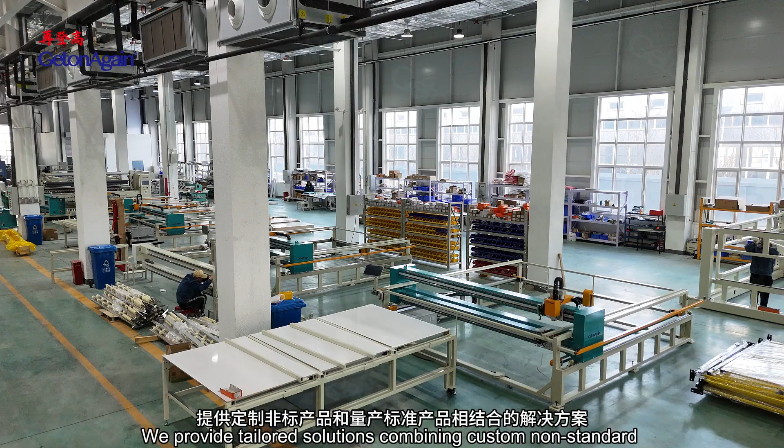We provide tailored solutions combining custom non-standard products with mass-produced standard products, including mechatronic machines, automated production lines, and intelligent factory solutions.

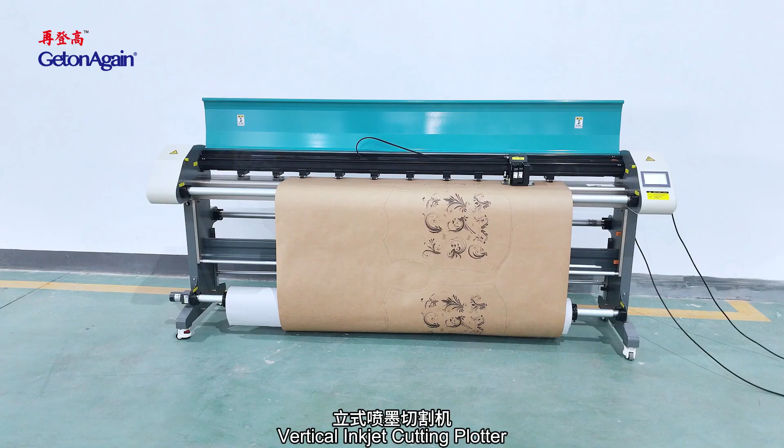Pattern room equipment includes the magic inkjet plotter: 2 cartridge with maximum printing speed at 110 square meters per hour, 4 cartridge with maximum printing speed at 200 square meters per hour. Vertical inkjet cutting plotter, 1 machine multiple functions, pattern drawing with cutting, or standalone drawing. High-quality rotary cutting knife can cut minimum 80 grams per square meter paper for sample design, cost saving.

Flatbed inkjet cutting plotter, full speed map printing and cutting function, suitable for personalization, configured with long knife or short knife, and optional fixed knife sleeve or elastic knife sleeve, suitable for cutting various materials.

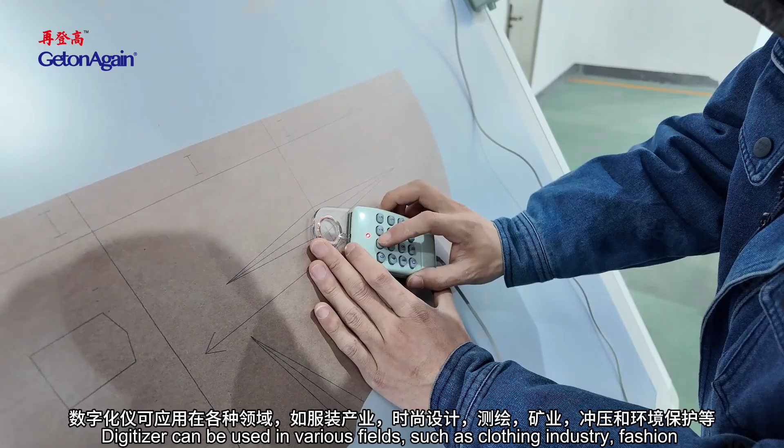Digitizer: easily reading paper patterns, convenient positioning, simple operation, accurately reading patterns, enables speeding up the design. It is a powerful tool for traditional manual drawing digitization. Digitizer can be used in various fields, such as clothing industry, fashion design, surveying and mapping, mining, stamping and environmental protection, etc.

Flatbed scanning digitizer: 1 button to start after placing scanning pieces. Can vacuum absorption auto scanning, auto transmission. According to different models, support ultra long width scanning. Scanning speed up to 7,200 mm per minute. Scanning resolution 150 to 300 dpi. High definition panoramic 1:1 image to ensure effective identification of various contours, notches, inner holes.

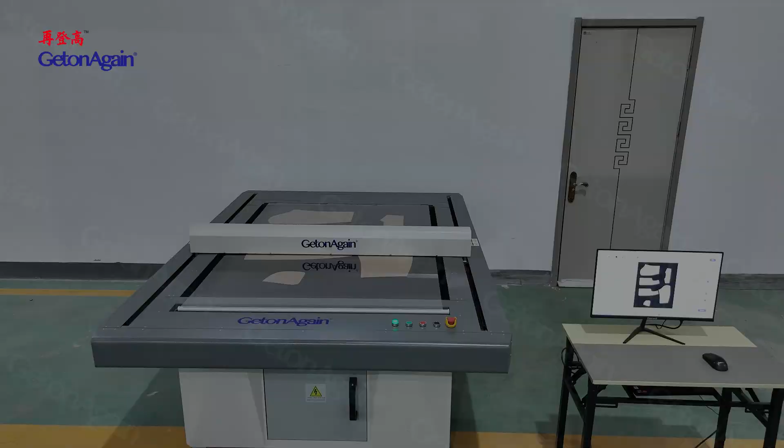Cutting equipment includes automatic spreading machine. Easily set the spreading method, length, speed, quantity and sections, with intuitive as well as simple operation. Dual use for both knit and woven fabrics, suitable for t-shirts, children's clothing, loungewear, and toy textiles.

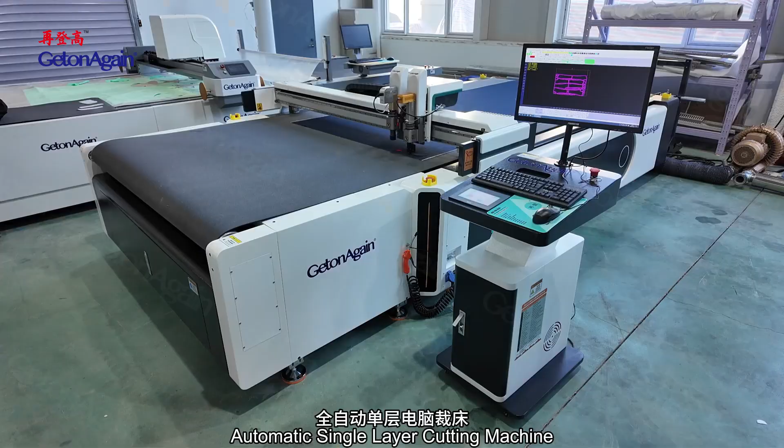Automatic single layer cutting machine. No need to create specialized cutting molds. Cutting can be performed precisely by directly importing CAD design drawings into the equipment. Optimizes cutting paths, integrates repeated cutting lines, allows for pre-simulation of the cutting process, and supports continuous cutting for extra long materials.

Stripe and plaid matching cutting machine, equipped with a few HD industrial cameras, according to the capture size to perform intelligent combination. Ensures high accuracy fabric image capturing.

Stripe and plaid matching auto cutter, equipped with double knives and pen draw punching working mode, special for various stripes and plaids fabric cutting in single ply.

High-end clothing customization: the effect of the alignment matched stripe and plaid process has become the important measurement on the quality of this type of clothing. Stripe and plaid auto cutter is the equipment specially developed for this process to meet matching stripe and plaid clothing, suitable for single ply cutting. Process of striped and plaided fabrics.

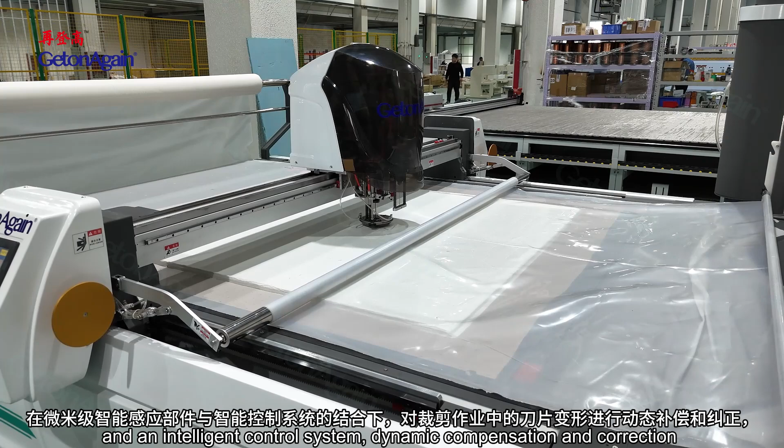Automatic multi-layer cutting machine: through the combination of micron-level intelligent sensing components and an intelligent control system, dynamic compensation and correction of cutter deformation during cutting operations are achieved, significantly reducing errors between the top and bottom layers of fabric during cutting, enabling truly high-precision intelligent cutting.

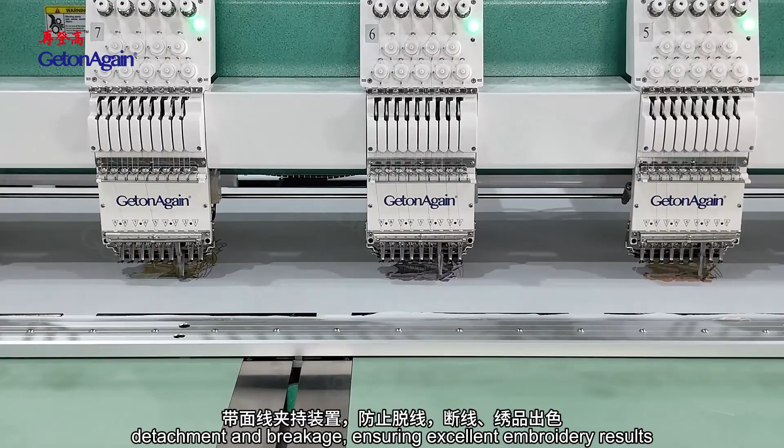Computerized embroidery machine: high-speed embroidery head with extremely low failure rates, long service life, low noise, and stable, reliable quality. Equipped with an upper thread clamping device to prevent thread detachment and breakage, ensuring excellent embroidery results. Suitable for textile and garment manufacturing, footwear, hats, bags, home decoration, automotive interiors, and industrial products area.

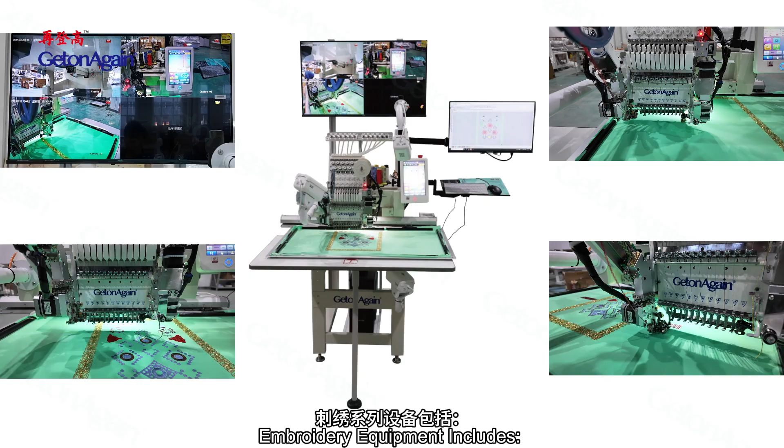Embroidery equipment includes the Cloud Smart Teaching Embroidery Machine, suitable for integrated theoretical and practical teaching of computer embroidery in fields such as fashion and apparel design, clothing design and engineering.

Computer Precision Embroidery Machine features a high-speed sewing head with extremely low failure rates, long service life, low noise, and stable, reliable quality, suitable for embroidering small letters, premium garments, high-end home textiles, footwear, hats, automotive products with embroidery, etc.

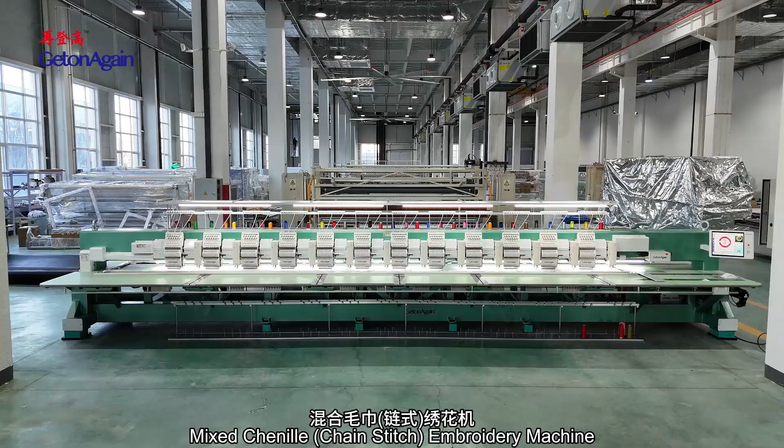Mixed chenille chain stitch embroidery machine. Mixed embroidery feature, according to color sequence settings, switchable between chenille embroidery and flat embroidery, simplified operation. Chenille needle height can be adjusted for 10 levels according to chenille pile height or chain stitch thread thickness. Multifunctional embroidery on garment, shoes, caps, home textile, toys, bags and luggage, art craft, etc.

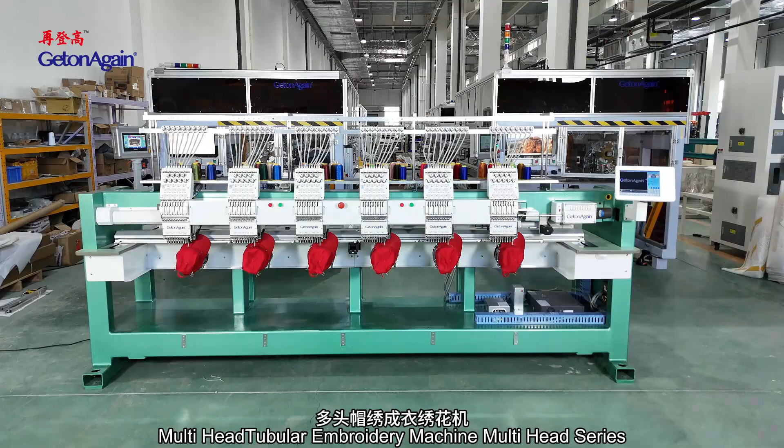Multi-head tubular embroidery machine series, suitable for embroidering on flat, caps, garments, shoes, belts, bags, etc. Auto thread trimmers, auto color change, auto thread break detection, 270 degree wide angle cap system, red light locating, LED lighting, precise head and drive system to ensure exquisite embroidery work. Drop tables, easy to lift up and down.

Multiple heads greatly improve work efficiency, suitable for embroidery shops and factories of a certain scale.

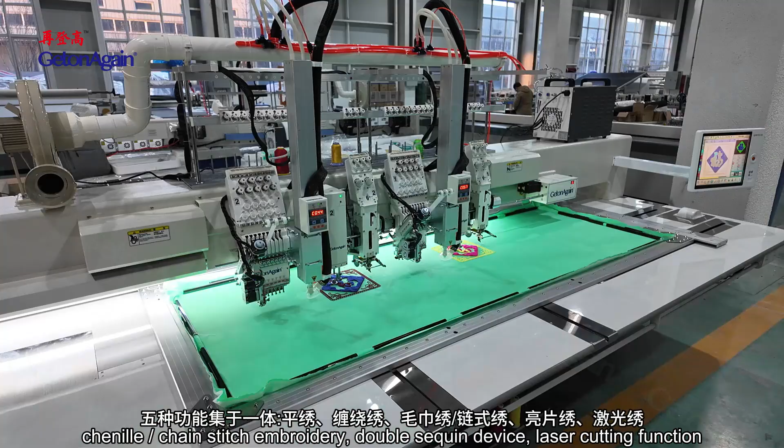Computerized 5-in-1 embroidery machine integrates 5 functions in one machine: flat embroidery, coiling, clip cording embroidery, chenille, and chain stitch embroidery, with double sequin device and laser cutting function. High precision, strong stereo sense, ideal artistic effect, suitable for embroidery of apparel, home textile, furniture, teaching, design, and arts and crafts, etc.

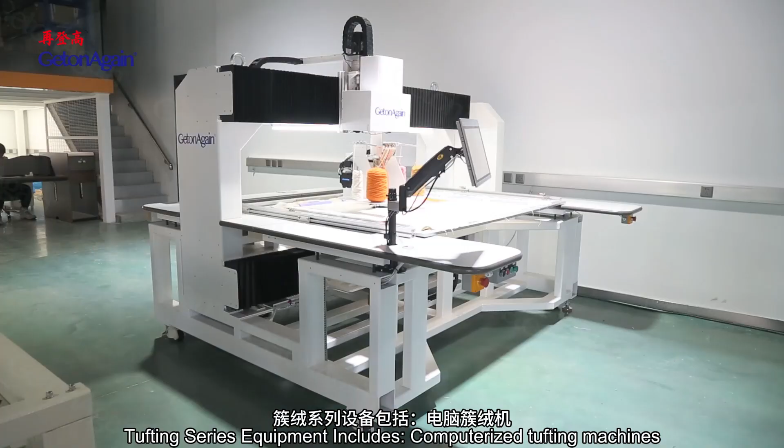Tufting series equipment includes computerized tufting machines with rotary tufting head at any angle, avoiding positive-negative stitching difference for higher efficiency and better tufting result. Suitable for various rugs, carpets, hanging carpets, tapestry, and other flooring decorative and home furnishing products tufting.

Laser equipment includes small format camera positioning laser engraver cutting machine, supporting array recognition processing with options for full sheet recognition followed by cutting, or simultaneous recognition and cutting. Features multi-template mixed cutting, allowing recognition and positioning of different patterns to be completed in a single operation.

Sewing equipment includes fully automatic perforation and sewing integrated machine. The punching machine head is specifically designed and developed for leather materials, equipped with various round punching tool specifications. The sewing head up moving stroke is 50mm, providing sufficient space for material loading and easy operation. Suitable for perforation and sewing processes of various types and thicknesses of genuine leather and microfiber leather used in car seats, automotive interiors, aircraft seats, luggage, furniture, and more.

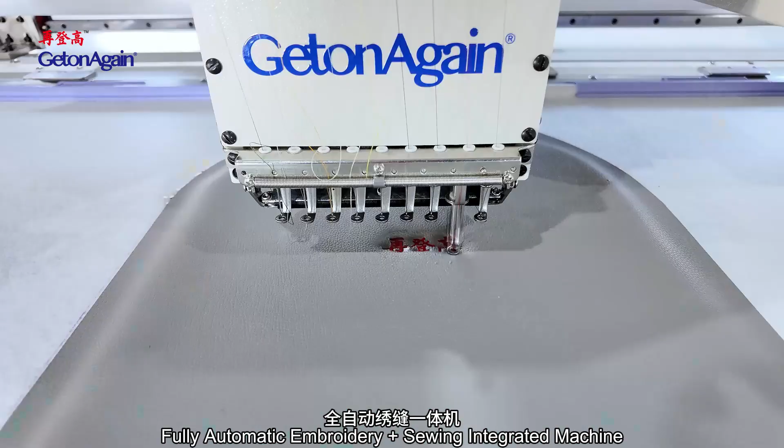Fully automatic embroidery and sewing integrated machine. 9-color embroidery machine head meets the embroidery needs of different industries. The embroidery thread clamping mechanism incorporates a novel upper thread clamping assembly, effectively reducing thread breakage and slippage occurrences during operation. Specially designed sewing machine head for leather materials produces beautiful stitching, with presser foot height motor controlled and highly adjustable.

Sewing machine head has up-down moving stroke of 50mm, providing ample space for material loading and ease of operation. Suitable for various types and thicknesses of genuine leather and microfiber leather for automotive seats, car interiors, aviation seats, luggage, furniture, etc., combining embroidery and sewing processes.

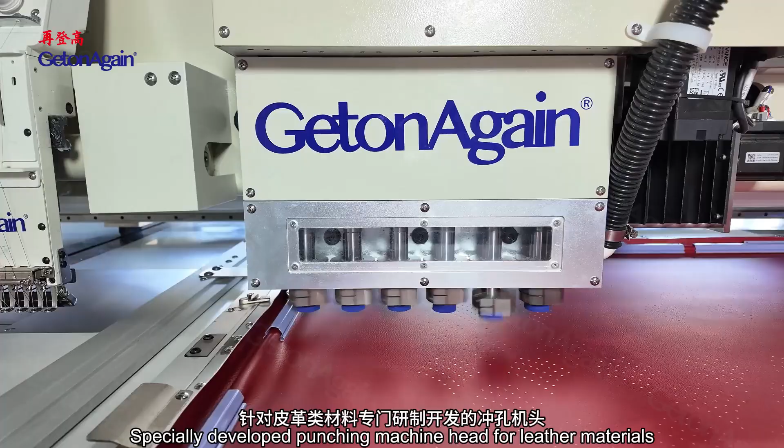Fully automatic perforation, embroidery, and sewing rotating head machine integrates punching, embroidery, and sewing into one machine, allowing for arbitrary pattern design and seamless combination of these complex processes. Specially developed punching machine head for leather materials, with 9-color embroidery head meeting the embroidery needs of various industries.

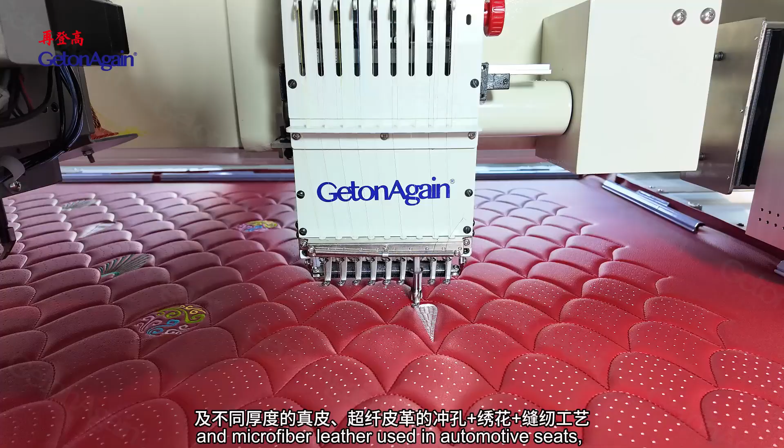Sewing machine head features an arbitrary rotation structure, creating beautiful stitching, reducing frame movement frequency, and improving efficiency. Suitable for punching, embroidering, and sewing processes for various types and thicknesses of genuine leather and microfiber leather used in automotive seats, car interiors, aviation seats, luggage and furniture, etc.

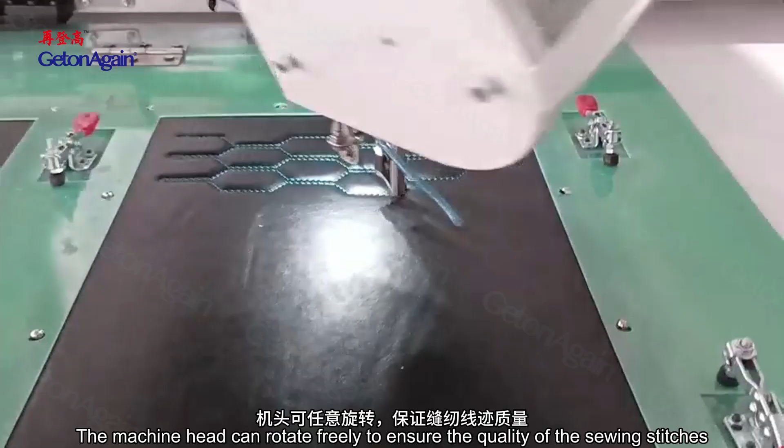Automatic template sewing machine with rotary head for heavy material. Both the X and Y axis use a screw and slide transmission method, providing high precision and good stability. Suitable for pattern sewing on leather and heavy materials such as car seats, sofas, massage chairs, boat interiors, and aircraft seats. The machine head can rotate freely to ensure the quality of the sewing stitches.

Automatic template sewing machine with double belt, double guide rail, double stepper motor structure. The machine head adopts oil-free lubrication, and the rotary shuttle adopts oil-line lubrication technology to completely eliminate fabric pollution. It identifies patterns through RFID barcodes and automatically switches to the corresponding sewing program for quick sewing. Used for template sewing processes such as opening pockets, notches, bag covers, collar trimming, etc.

Pattern sewing machine. This machine can easily sew 1200D thick thread with a thickness of 12mm, 2 times large rotary hook automatic thread trimming, and the maximum sewing speed can reach 2500 rpm.

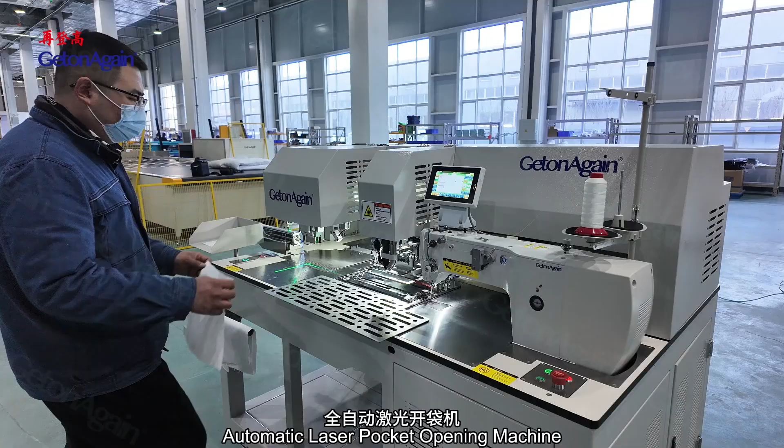Automatic laser pocket opening machine with automatic ironing-free pocket folding, automatic material feeding, laser pocket opening, automatic sewing, automatic thread trimming, and automatic material collection.

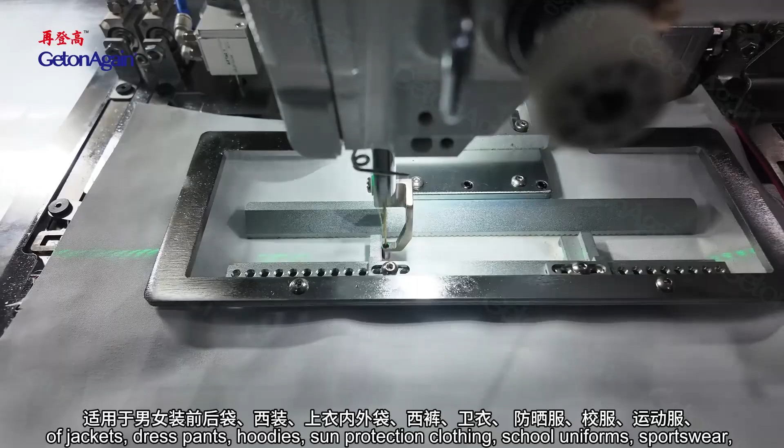Suitable for front and back pockets for men's and women's clothing, suits, inner and outer pockets of jackets, dress pants, hoodies, sun protection clothing, school uniforms, sportswear, cotton padded jackets, down jackets, workwear, jackets, uniforms, trench coats, cashmere coats, and plackets for polo shirts.

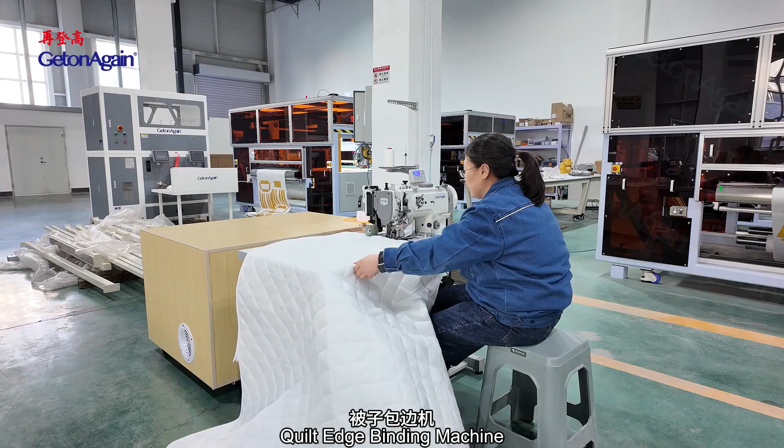Quilt edge binding machine features single needle compound feed, achieving cutting, binding, and sewing in one seamless operation. Enlarged right side waste discharge port with pneumatic waste discharge assistance ensures smoother disposal of waste generated during edge cutting. Special synchronized feeding structure, including alternating presser foot, needle, feed dog, and binding attachment, ensures no wrinkles or misalignment during straight line or corner sewing for a flawless binding effect.

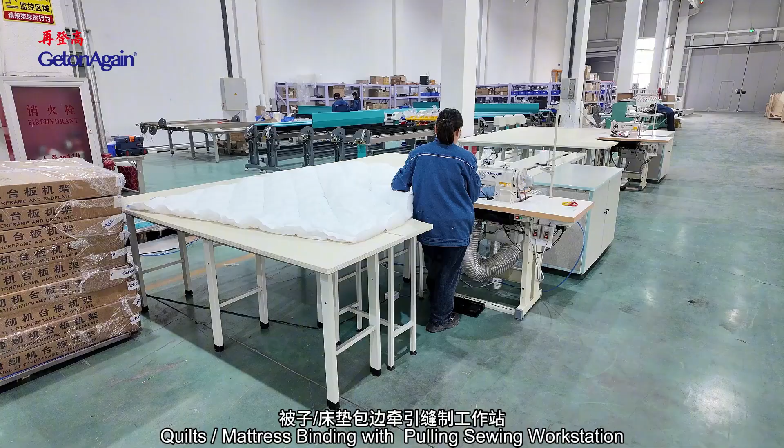Designed for edge binding processes of quilts such as cotton quilts, summer quilts, spring and autumn quilts, and other bedding items, including mattress binding with pulling sewing workstation. Equipment factory standard provides air floating table and automatic pulling device.

Make sewing worker operation easier and smoother. Equipped with PLC control pulling device, synchronized with sewing machine electronic control. These two machines work at the same speed and synchronize the direction.

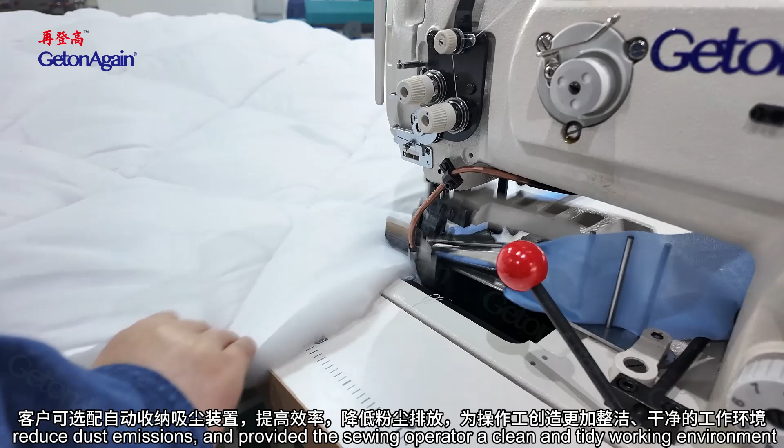Optional automatic storage and vacuuming device improves efficiency, reduces dust emissions, and provides the sewing operator a clean and tidy working environment. The binding result has a rich, strong, solid feel. Corners are smooth and nice.

Evenly stitched lengths, no hairy edge, no edge folding, neither corner raising effect, nor other negative symptoms. Automatic mattress protector skirting sewing machine, interlock and overlock, suitable for processing fitted sheets, all in one to finish binding stitching of elastic rope cord and bed skirt, and the overlocking of bed skirt to mattress protector topper layer.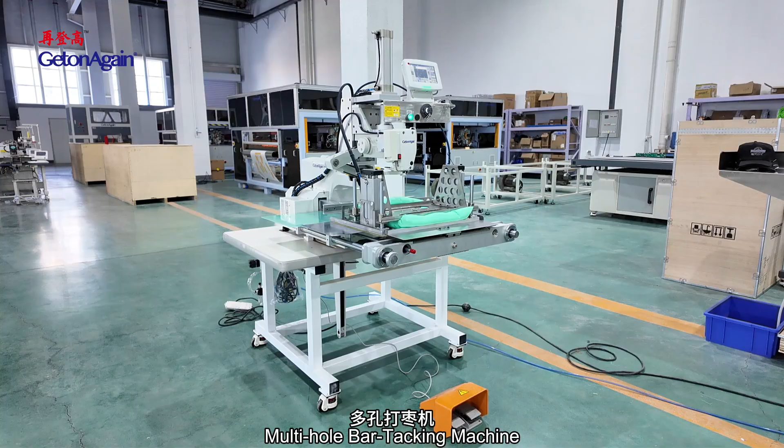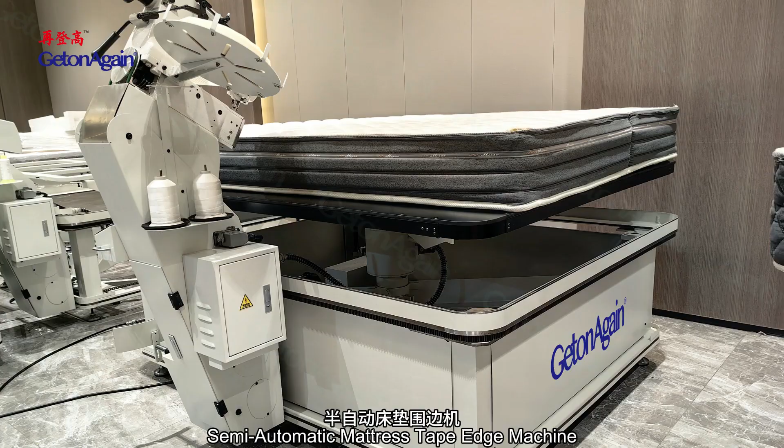Multi-hole bar tacking machine, press arm and sewing frame work synchronously, ensuring high precision bar tacking. Suitable for chair pad, cushion and pillow, all those with fillings, and bar tacking requirements for reinforcing sewing work. Semi-automatic mattress tape edge machine, primarily designed for sewing spring mattresses.

This machine efficiently completes edge overlocking between mattress fabric and sidewall fabric. It is also suitable for sewing other types of mattresses and sofa cushions. Key features include an electrically adjustable work table with high strength, independent support, ensuring exceptional stability during operation.

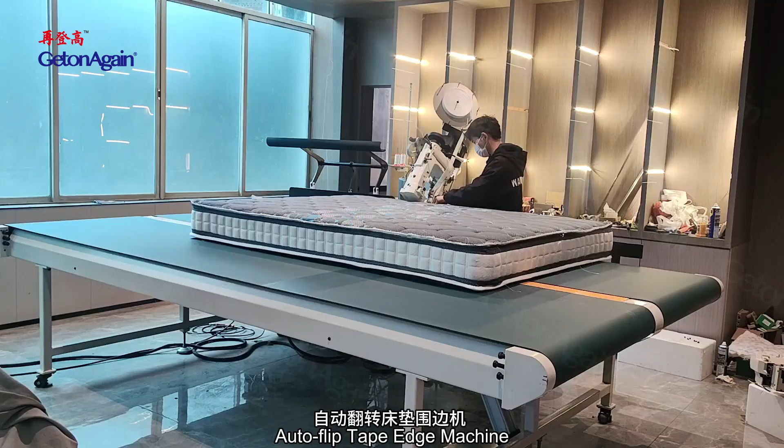Auto flip edge machine: automated transfer table and mattress turnover arm enable the operator to work in one position without moving around. Variable speed drive automatically slows down on turning corners. The machine head can rotate freely to ensure the quality of the sewing stitches.

When ready to sew the opposite side, the turnover arm unit flips the mattress automatically. Machine head height and inclination are adjustable.

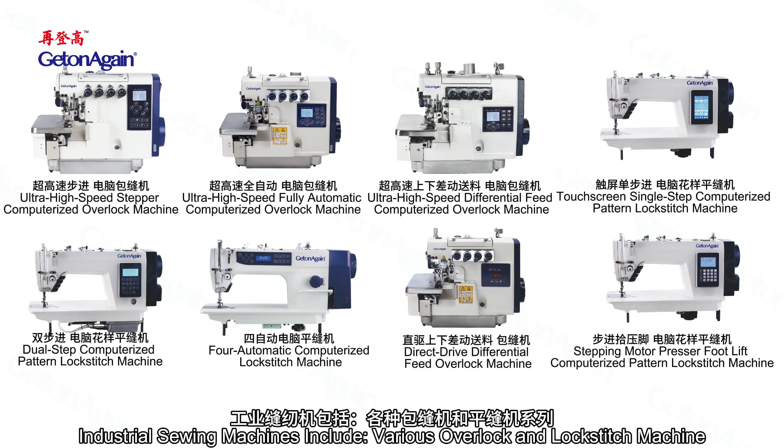Industrial sewing machines include various overlock and lock stitch machines. Computerized synchronized hot cutting binding machine, designed for products requiring binding processes, is equipped with a standard pneumatic hot cutter. The binding tape no longer requires manual cutting; simply press a button to complete precise cutting. The hot cutting edges are clean, with no fraying or loose threads, significantly improving production efficiency.

Mattress handle stitching machine, fully automatic operation, controlled via touch screen. Customized stitching patterns are possible, significantly improving production efficiency. Easy to operate, precise positioning.

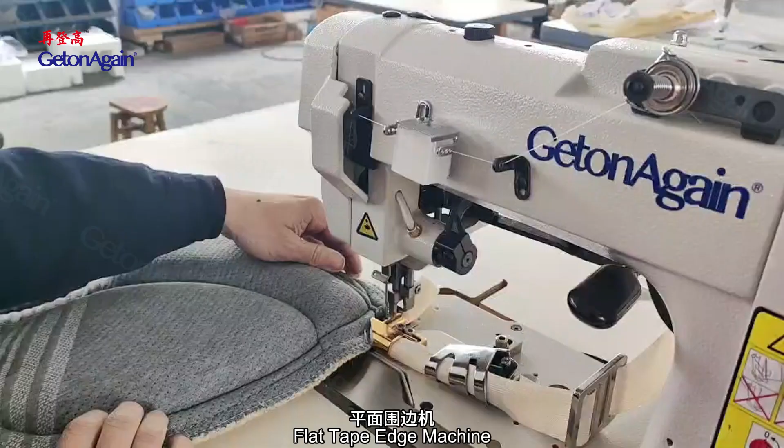Flat tape edge machine, mainly used for stitching between mattress fabric and side border. Suitable for sewing other soft mattresses, bedding, sleeping bags, and tents. Stable performance, little vibration, low noise, and high efficiency.

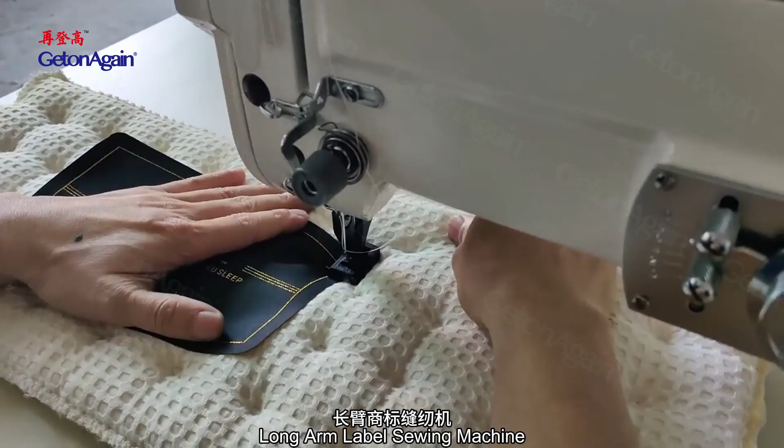Long arm label sewing machine adopts connecting rod thread pickup, large rotary hook, needle bar swinging up and down, feeding simultaneously, forming zigzag lock stitch. Reasonable swing mechanism makes switching between zigzag sewing and normal lock stitch easy and free. Upper and lower synchronous feeding structure makes it easy to operate, with good sewing effect and beautiful stitches.

Long arm repairing machine, mainly used for the applique work of mattress crepe fabric. The upper and lower shafts of the machine are of integral structure, and the servo motor from Taiwan is used to automatically position the needle. The new presser foot is equipped with a needle bar lifting device to make thick fabric appliqué more convenient and beautiful.

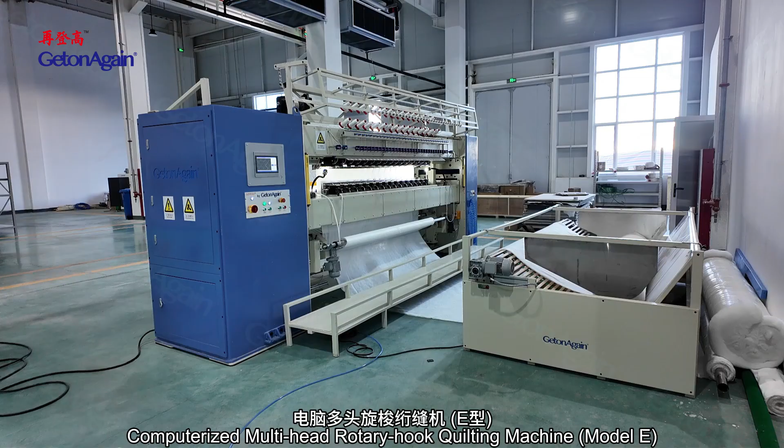Computerized multi-head rotary hook quilting machine model E features a 5-time jumbo rotary hook, less bobbin changing frequency, beautiful stitches, no lost stitch, no thread loops. The interval between the upper and lower needle bars can be adjusted to any value from 3 to 9 inches. The lower needle bar can move half the needle pitch in the X direction, so that quilting needle bars of different sizes and patterns can be combined, especially for some non-standard size patterns, which can achieve a unique effect.

Computerized multi-needle shuttle quilting machine flying shuttle, for quilting of fitted sheets, bed covers, summer quilts, and clothing products with quilting patterns.

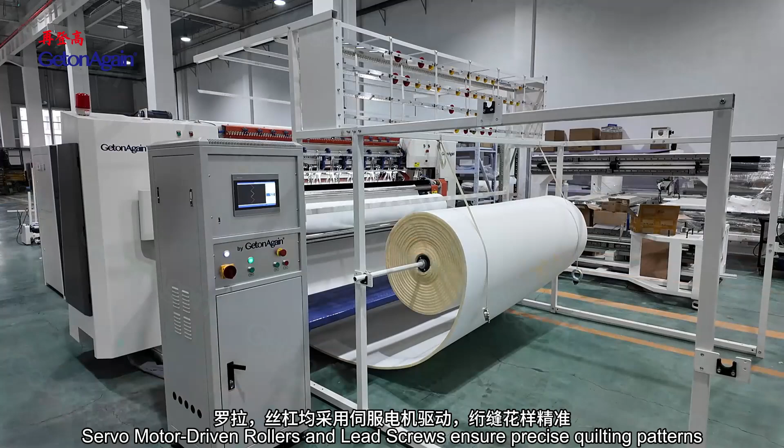Computerized multi-needle chain stitch quilting machine: servo motor driven rollers and lead screws ensure precise quilting patterns, suitable for mattresses, mattress covers, sofas, bedding, home textiles and home decor.

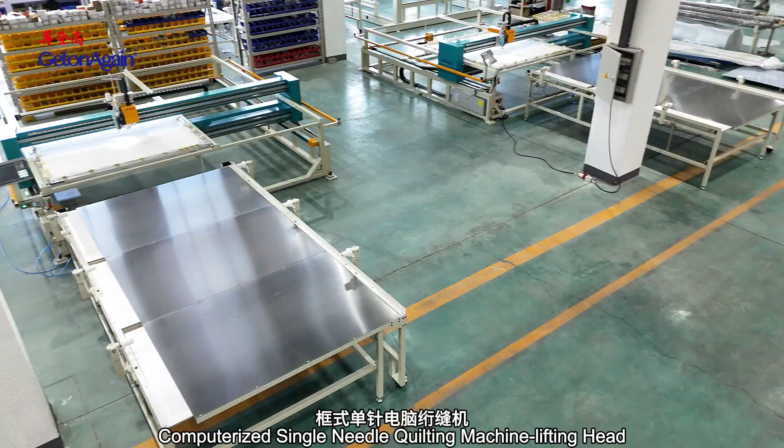Computerized single needle quilting machine with lifting head. The extendable quilting frame can be freely adjusted according to required size. GetonAgain quilting head, independent presser foot drive, suitable for various materials with different thickness.

Full servo motor control provides powerful and accurate driving force. Automatic lifting head easily changes the frame after finishing quilting. Neon quick frame changer optional, for quilting process of home textile products such as quilts, comforters, mattress protectors, blankets, sleeping bags, single needle art quilts, etc.

Ultrasonic equipment includes the ultrasonic slitting machine, which adopts ultrasonic cutting technology to ensure smooth cutting edges and precision edge cutting with no deformation, free without fraying, no fiber pull, and no edge curling problem after cutting. Cutting rollers and patterns can be customized to meet various needs.

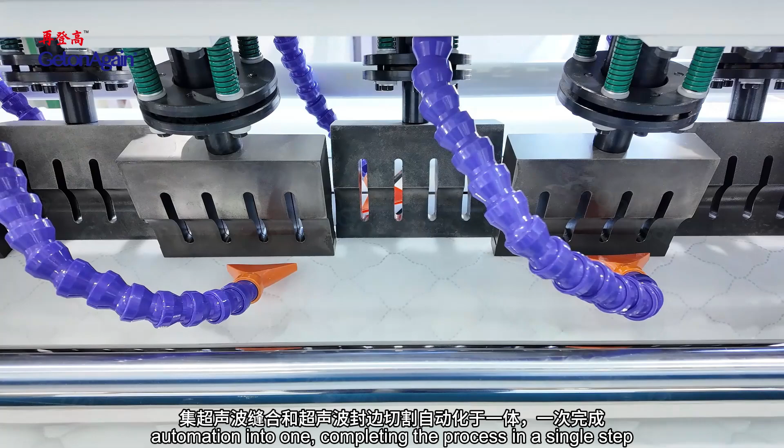The automatic ultrasonic quilting machine integrates ultrasonic sewing and ultrasonic edge sealing and cutting automation into one, completing the process in a single step. The latest structure design with interleaved transducers ensures embossing that is seamless and non-wrinkled.

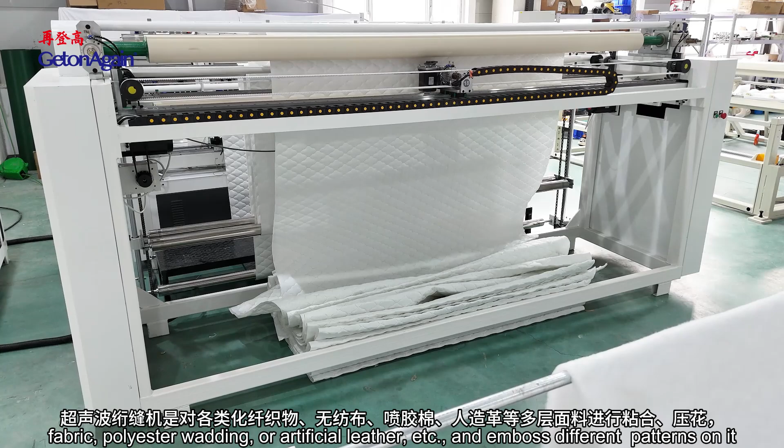After quilting, it can be connected with a cutting machine for the finished product, or connected with a rewinding device for fabric rolls. The ultrasonic quilting machine bonds multiple layers of polyester fabric, non-woven fabric, polyester wadding, or artificial leather, etc., and embosses different patterns on it. Patterns are clear and beautiful, fabric doesn't deform, with strong bonding and high efficiency.

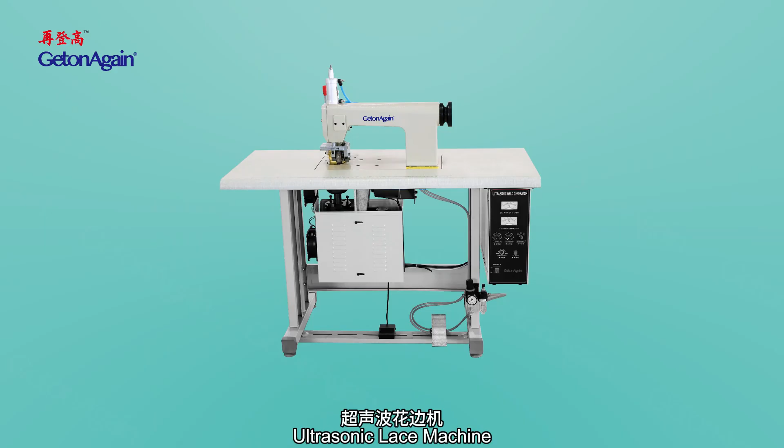Ultrasonic lace machine: ultra-high power output with adjustable power to meet the welding and cutting requirements of different materials and thicknesses. Mold size width is 23 to 60 millimeters.

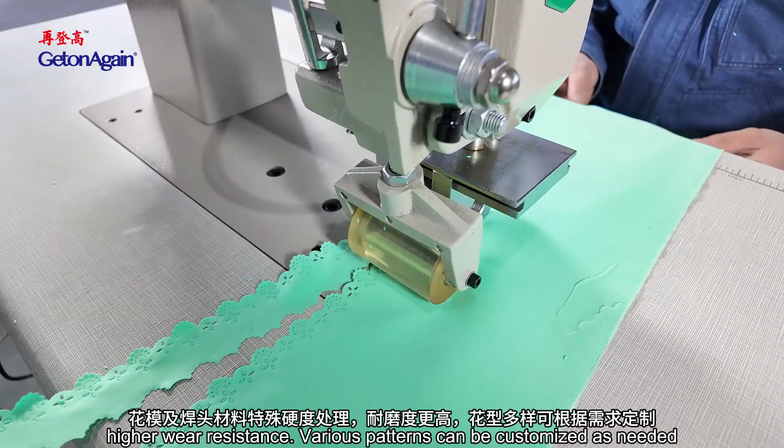Mold lifting system with options for manual or pneumatic operation. Stripping allows simultaneous single or multi-strip cutting with edge melting treatment for clean burr-free edges. Pattern molds and welding heads undergo special hardness treatment for higher wear resistance. Various patterns can be customized as needed.

The cutwork lace cuts various patterned holes with edge melting treatment, high running speed, and simple operation. Bonding seamlessly fuses 2 or more layers of fabric together without thread or needles, ensuring strong welding strength.

Suitable for lace, decorative ribbons, home textile products, umbrella lace, tablecloths, automotive interiors, non-woven shopping bags, carbon bags, eyeglass cloth, etc.

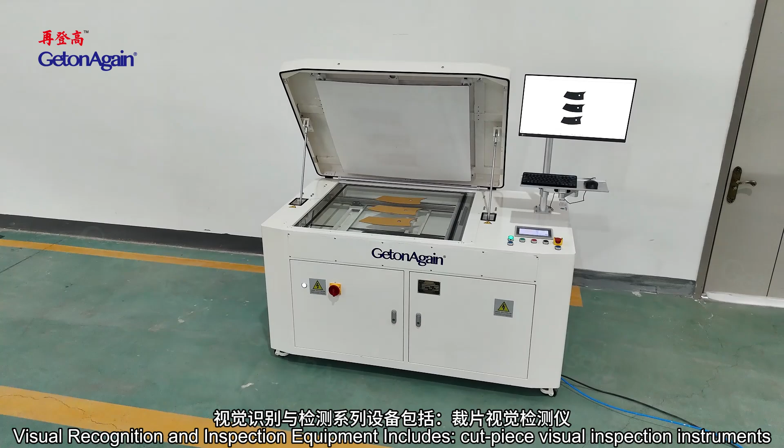Visual recognition and inspection equipment includes cut piece visual inspection instruments. After manual placement, one-click start allows for automatic scanning, automatic inspection of cut pieces, and automatic data storage.

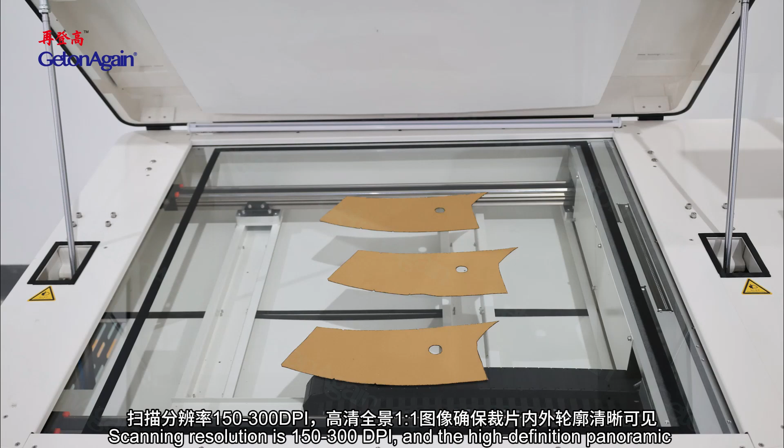Scanning speed can reach up to 120 mm per second, with no need for additional lighting, ensuring reliable use in all weather conditions. Scanning resolution is 150 to 300 dpi, and the high-definition panoramic 1:1 image ensures that the inner and outer contours of the cut pieces are clearly visible.

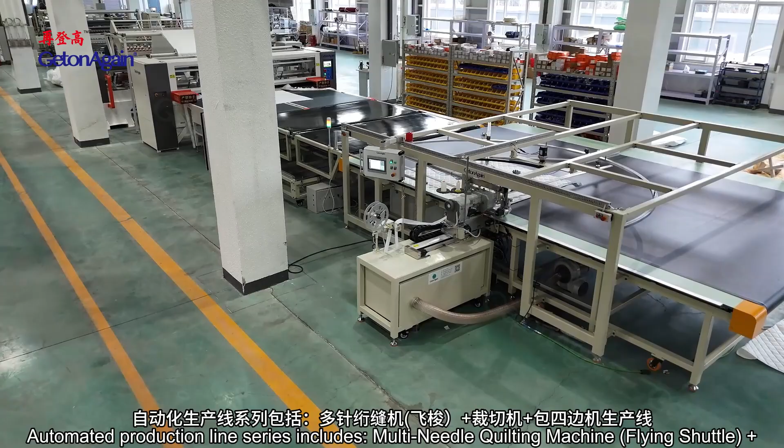Automated production line series includes the multi-needle quilting machine, flying shuttle and cutting machine, and four-side tape binding machine production line.

Multi-needle quilting machine: the raw materials are quilted and fixed with lock stitches, mainly used to process quilt cores and cushions. Cutting machine: cuts the quilted semi-finished materials, including trimming, fixed length cutting, slitting and rolling, and other functions.

Alignment platform: the material transfer alignment mechanism. The cutting block waits to enter the next sequence on this platform, and at the same time the cutting block is aligned with the subsequent reference processing position by translation.

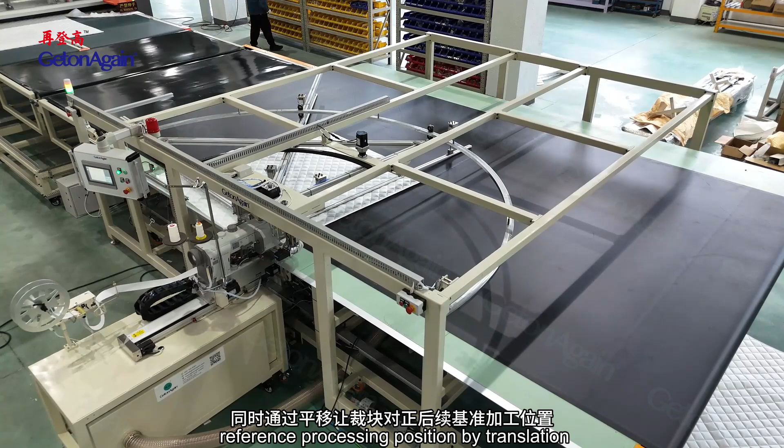Automatic tape binding machine: the cutting piece is processed by the tape binding machine to make the edge of the cut piece beautiful. The machine performs rounded corner tape binding process. The cutting and tape binding are integrated, and all actions are completed automatically.

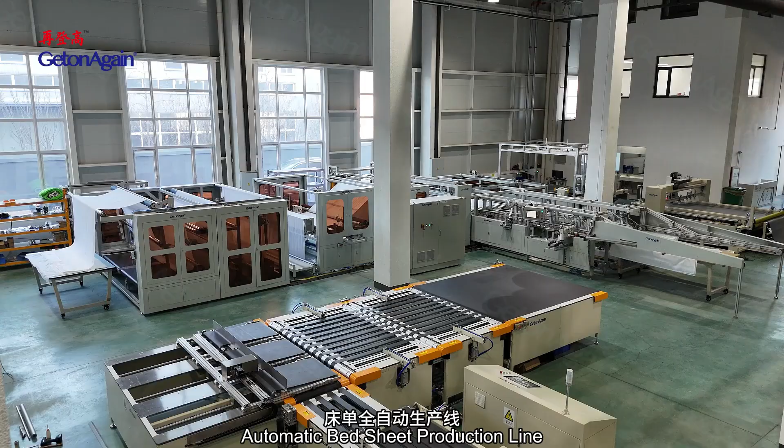Automatic bed sheet production line: a fully automated bed sheet production line composed of a feeding mechanism, an adjustable width longitudinal sewing mechanism, a fixed length transverse cutting mechanism, an automatic transverse conveying mechanism, an automatic hemming transverse seam mechanism, and a discharging mechanism.

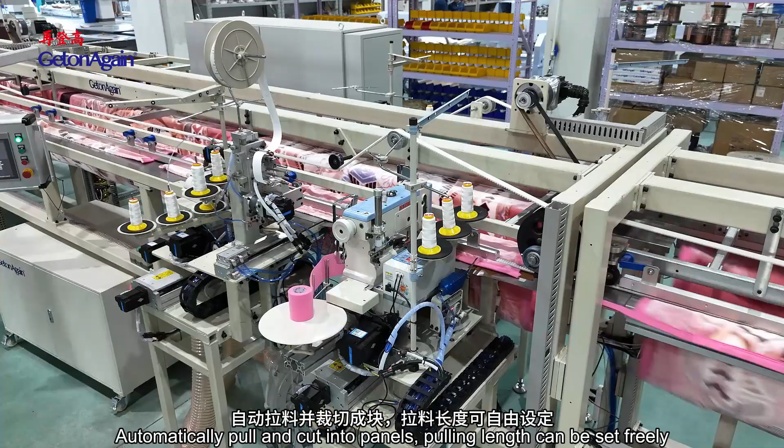Automatic blanket straight corner binding machine, capable of holding 2 rolls of non-elastic fabric, equipped with edge alignment function, automatically pulling and cutting into panels. Pulling lengths can be set freely. 4-side tape binding sewing process for inelastic blankets.

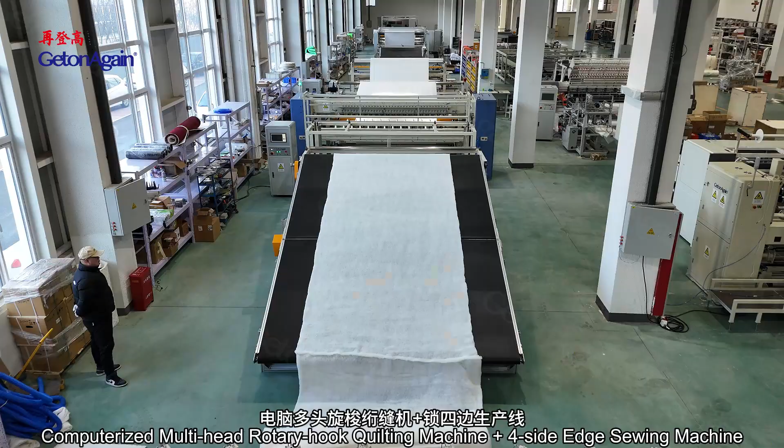Home textile comb cotton production line. Computerized multi-head rotary hook quilting machine and 4-side edge sewing machine, capable of quilting patterns in various sizes without changing needle positions, greatly enhancing operational efficiency.

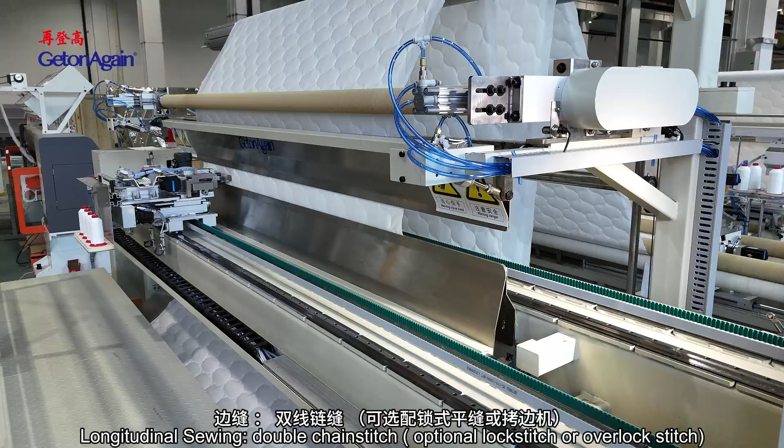Double row machine with lower needle row can move half of the head distance in the X direction, creating combination patterns of different sizes when coordinated with the upper needles. Longitudinal sewing uses double chain stitch, with optional lock stitch or overlock stitch. Transversal sewing uses multi-needle chain stitch sewing. Transversal cutting between the 4 stitches cuts as per set length and feeds to the next sequence.

Bath towel horizontal sewing machine, folding and sewing process for inelastic towels. Pre-sewing auxiliary equipment includes automatic edge alignment, relaxing machine, air blowing; roll fabric is unwound and folded in a flat fold state.

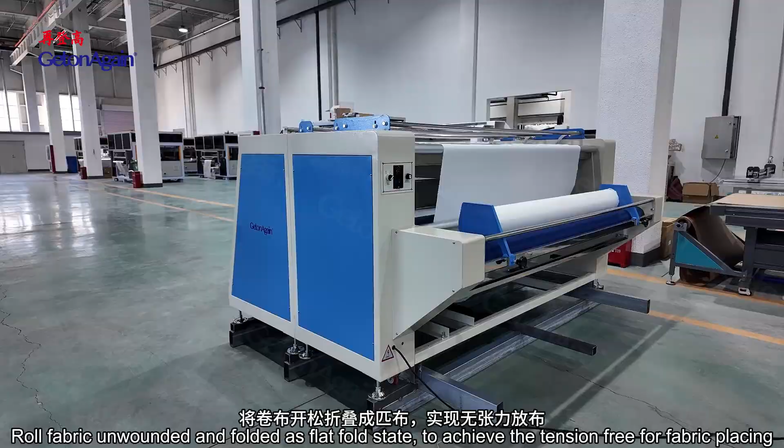This achieves tension-free fabric placing. The wave-type air blowing device loosens the fabric during the relaxing process.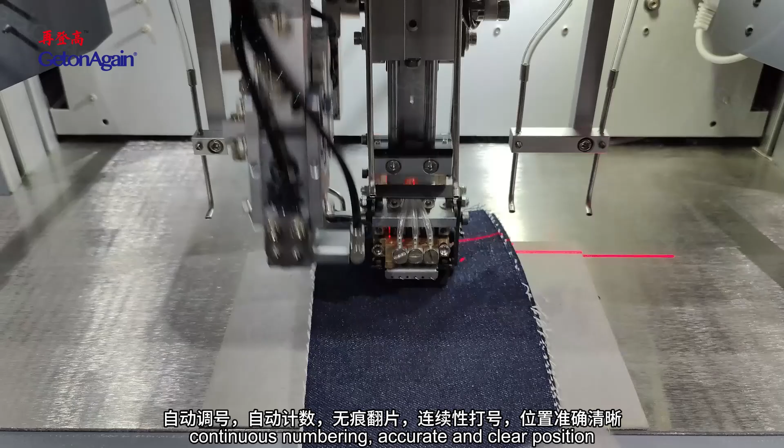Automatic marking machine: one-click start, intelligent grabbing, operated by one person handling 4 to 5 machines at the same time, reducing labor costs. Features automatic number adjustment, automatic counting, wrinkleless flipping, continuous numbering with accurate and clear positioning. Used for cutting pieces of jeans, shirts, workwear, down jackets, etc.

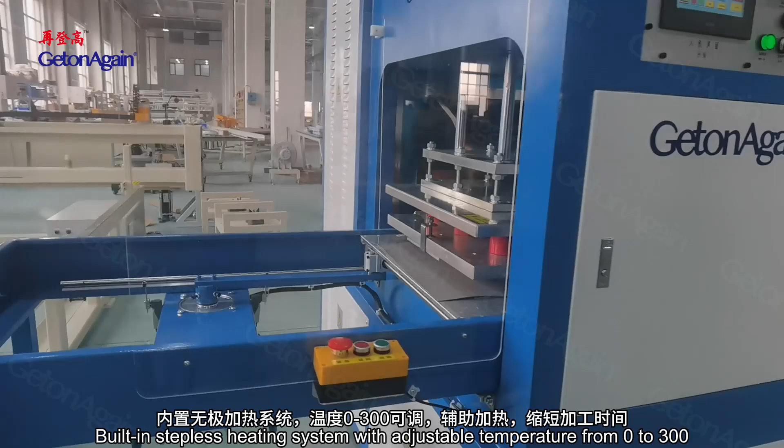High-frequency machine with built-in stepless heating system, adjustable temperature from 0 to 300, providing auxiliary heating to shorten processing time. Spark suppressor instantly cuts off current during sparking to prevent damage to molds and materials. Automatic overcurrent protection device protects electronic tubes and molds, extending their service life.

Used for embossing and stamping car and motorcycle foot mats, blister packaging, plastic heat sealing and leather embossing.

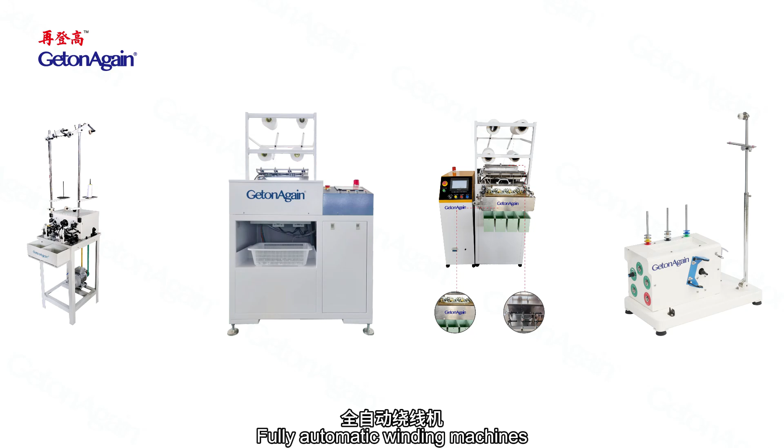Fully automatic winding machines. Post-finishing equipment includes a needle detector, applicable for large bulky products with ferromagnetic metal detection, for example bedding. Working width can be adjusted between 1,200 to 4,000 millimeters according to customer setting.

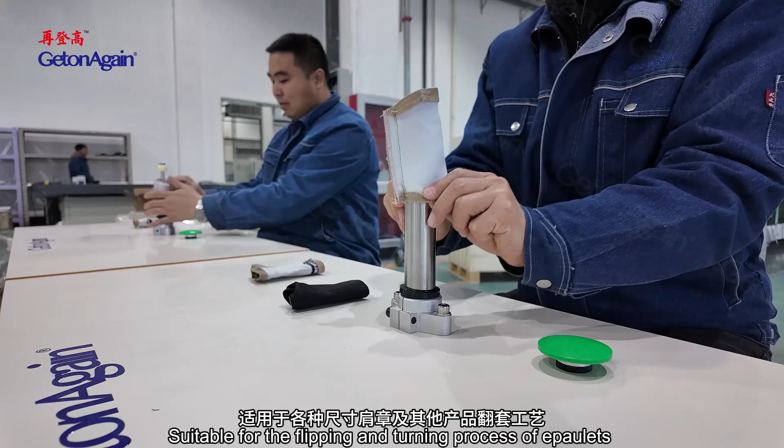Epaulet flipping machine replaces manual operation with high efficiency, safety and reliability, suitable for the flipping and turning process of epaulets or straps of various sizes and other products.

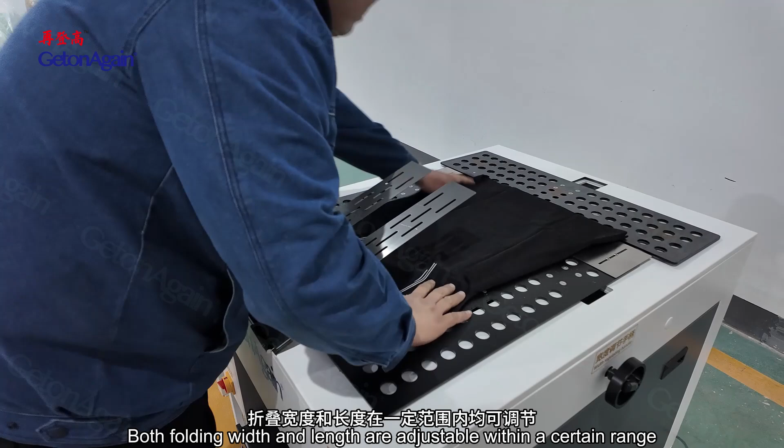Automatic folding and packaging machine: economical, small floor space, simple operation, standard folding effects, with automatic transferring to the next station in GOA ZD-ZD2 stacking mode. Two working modes, bagging and folding, are adjustable. Both folding width and length are adjustable within a certain range. Suitable for T-shirts, polo shirts, hoodies, thermal wear, pants and lightweight jackets, etc.

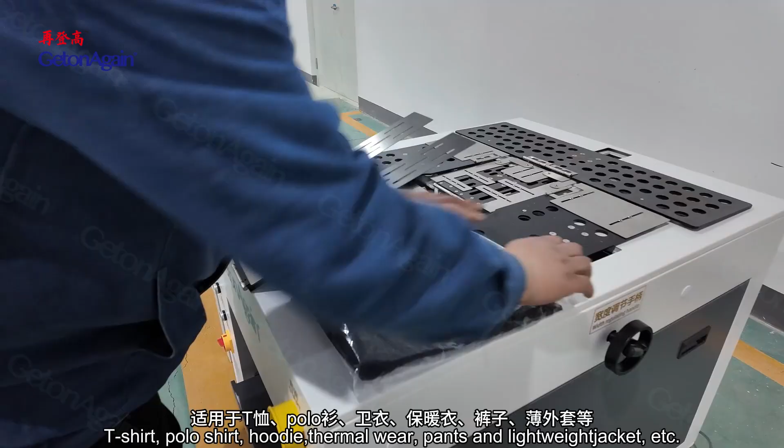Single and dual head cap pressing machine for baseball caps: steam time, cap clamping time, steam output, and air consumption can all be automatically adjusted. Built-in steam generator eliminates the need for an external boiler with automatic water supply, suitable for bulk order production needs. Using a robotic arm, it can automatically grip the cap; simply place the cap on the mold to complete the pressing process.

Roll fiber panel cutting and filling line: edge trimming, length counting, cutting for polyfiber, thermal bonded wadding, and chemical bonded wadding. Machine feature: unpowered material loader can pass bonded wadding to the panel cutter machine, equipped with bearings at two ends of each roller, saving labor and energy.

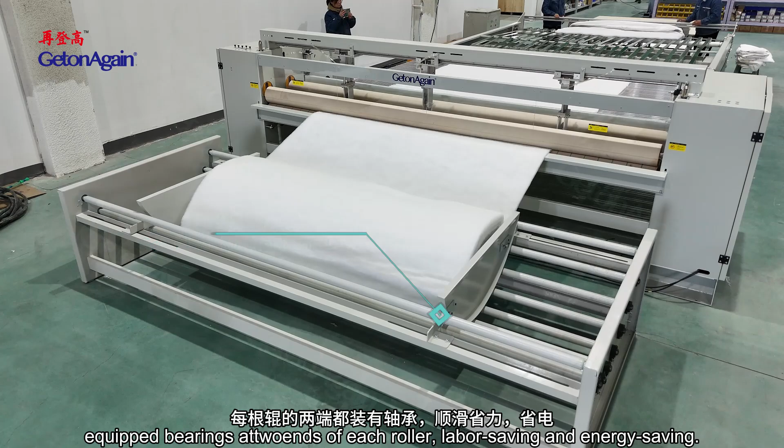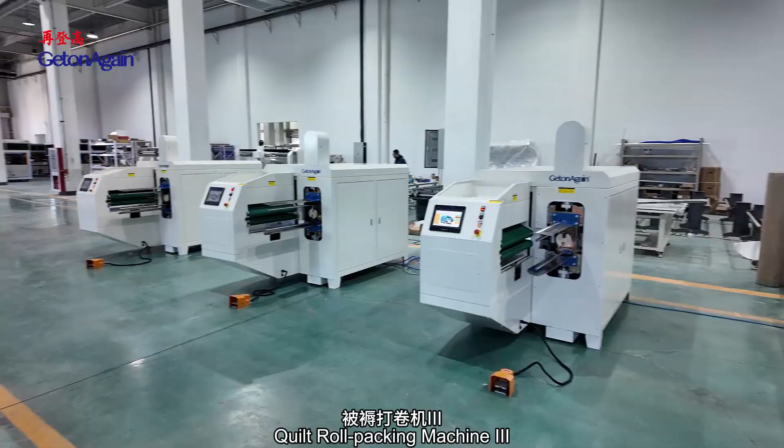Quilt roll packing machine, suitable for rolling and packing fluffy items such as quilts, pillows, cushions, etc., to reduce volume and storage as well as lower transportation cost. The packing item is auto-fed from backward to forward by the belt during the compressing process and rolled to pack into the bag.

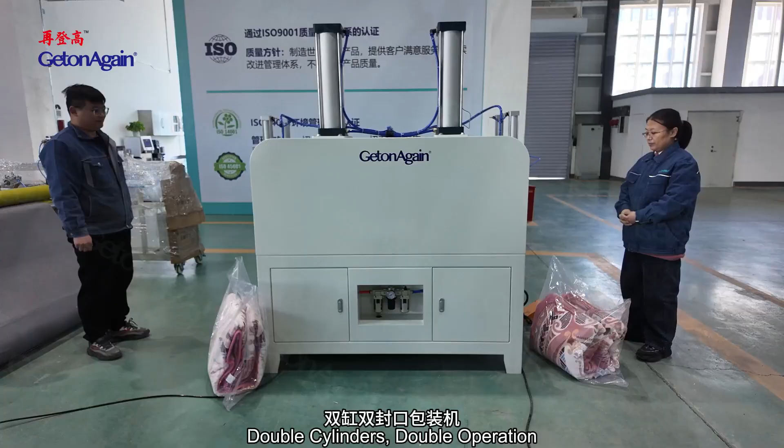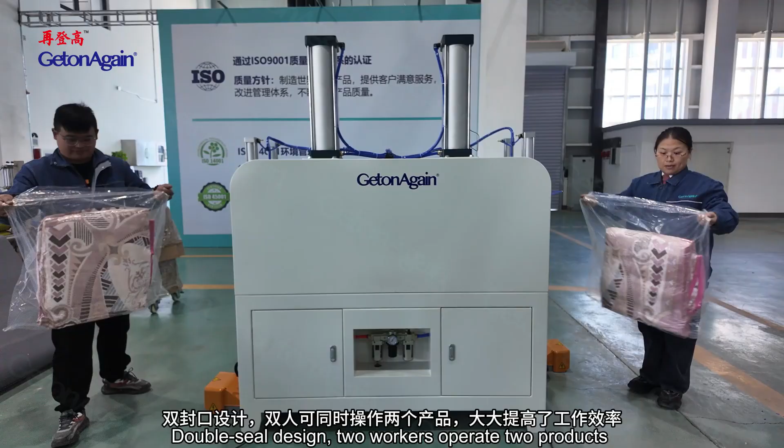Double cylinders, double operation, optional models. Double cylinders for double sealing and single cylinder for single sealing; the double cylinder design increases compression pressure and area. In the double seal design, two workers operate two products at the side of the machine, greatly improving work efficiency, suitable for compressed packing of pillows, cushions, bedding, plush toys and other products.

Automatic folding and packaging machine: the equipment mainly consists of a folding device, rolling device, and stacking and compress-plus conveyor device. In the folding device, after the quilt is detected and transported to the designated position by sensors, a robotic arm folds the quilt into a strip shape.

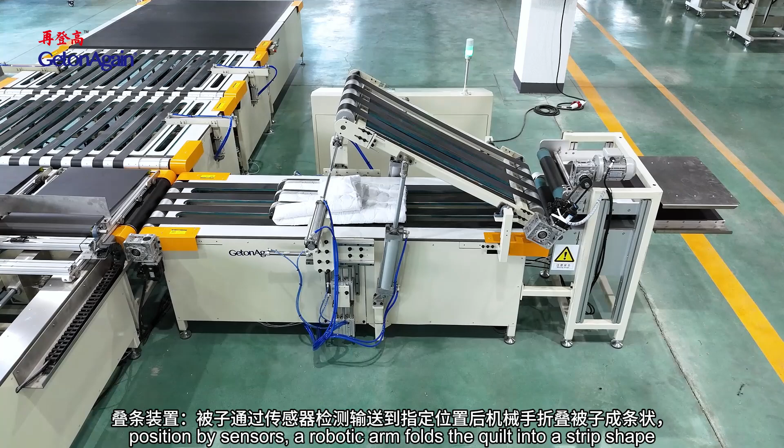After being detected by sensors, the strip-shaped quilt is transported to the designated position and folded into a block shape by a robotic arm. In the rolling device, the strip-shaped quilt is transported to the automatic rolling device to complete the rolling process.

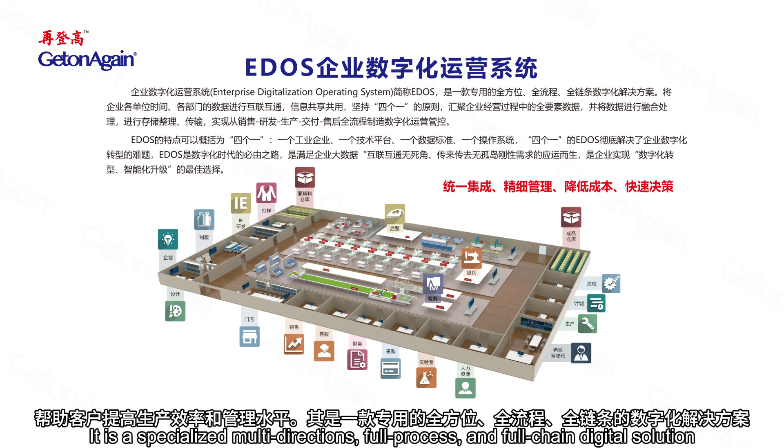In addition, Tianjin GetonAgain has developed a digital operation and management system for industries such as garment processing and machinery manufacturing. This system helps customers improve production efficiency and management levels. It is a specialized multi-direction, full-process, and full-chain digital solution. Its features can be summarized as the 4 ones: 1 industrial enterprise, 1 technology platform, 1 data standard, and 1 operating system. It is the optimal choice for enterprises to achieve digital transformation and intelligent upgrading.

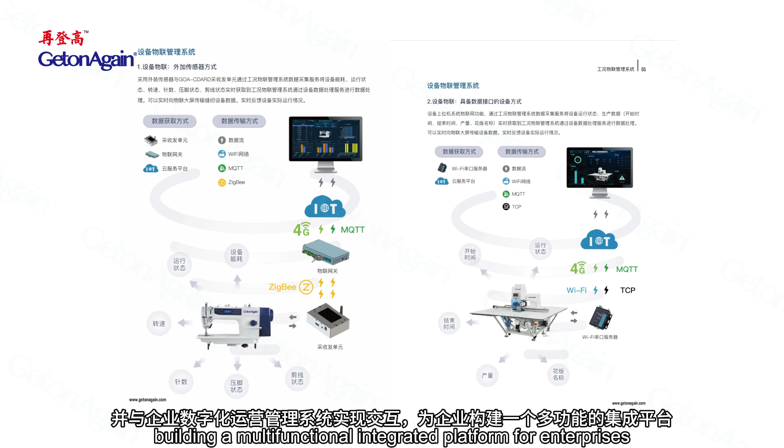Furthermore, by integrating internet and IoT technologies, the company has developed an enterprise operating condition IoT management system, which enables the interconnection of all equipment, products, energy consumption, environment, and security within the enterprise. This system interacts seamlessly with the enterprise digital operation and management system, building a multifunctional integrated platform for enterprises, enabling functions such as data collection, real-time monitoring, data analysis, and remote management.